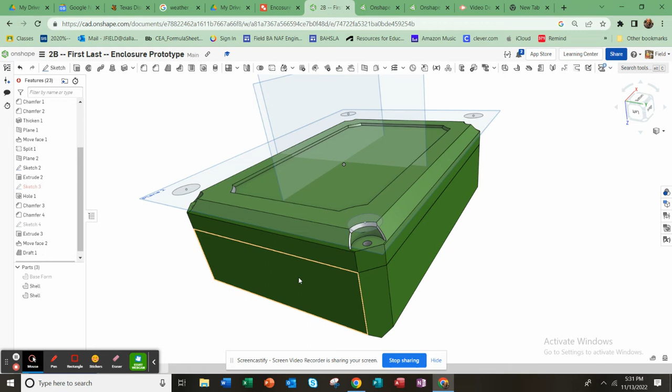Okay, once you've created your OnShape education account here and answered these questions, use your personal email so you can verify your account. There's two pages, then you verify your account and it brings you here. I'm going to show you how to progress in this EDD project.

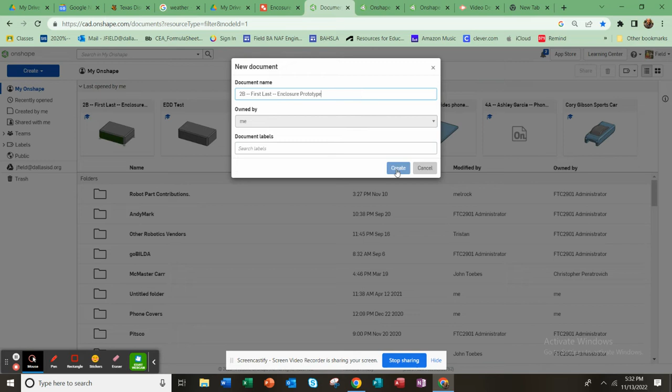You guys need to create these virtual products, and OnShape's a great tool for that. When you first log in, it brings you to this menu. I'm going to have you create a document, it works just like Google Drive. I'm going to name it: your period, your first last name, then enclosure prototype, space, dash dash, space, enclosure prototype, just like that shown. And then you hit create.

Since I like to grade these, for this assignment this week, hit share and then type in my email address, which is jfield, J-F-I-E-L-D, at DallasISD.org. You'll see my face come up there, select on it, and hit share. That's how I grade them.

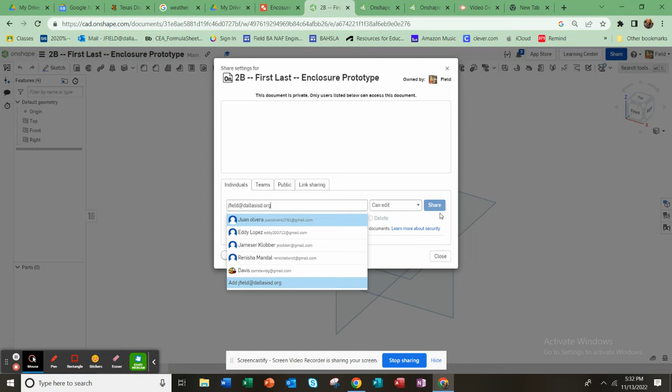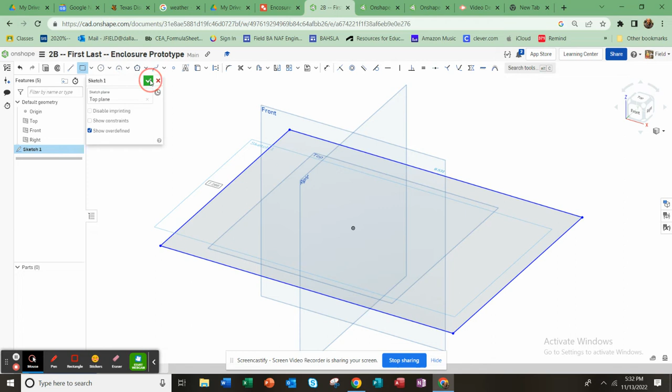Okay, so to make this enclosure prototype, we're going to start by selecting on the top plane over here. You can select over here on the left, and you've got a view cube on the right. In this case I want to sketch on it, so I make a 2-point rectangle by clicking the first point, dragging out, and selecting the second point. Then I hit the green check mark to end that sketch, and I can grab that closed profile I just made and drag it up, like that.

I'm going to move to viewing it with the perspective on, so that things get smaller as they get further away. I can see this a little better.

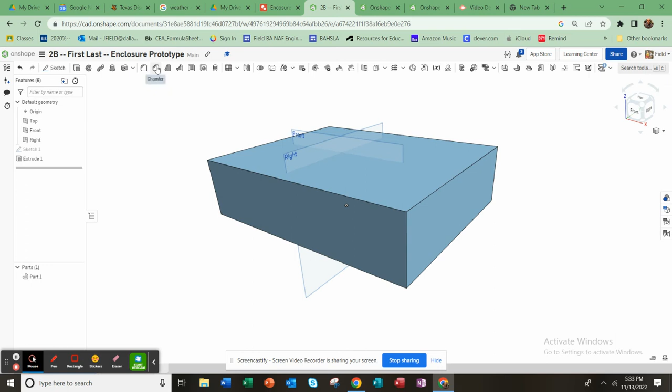Then I'm going to begin by chamfering the edge. You can chamfer just one edge of something, and you can type in the distance of the chamfer. Same with the fillets.

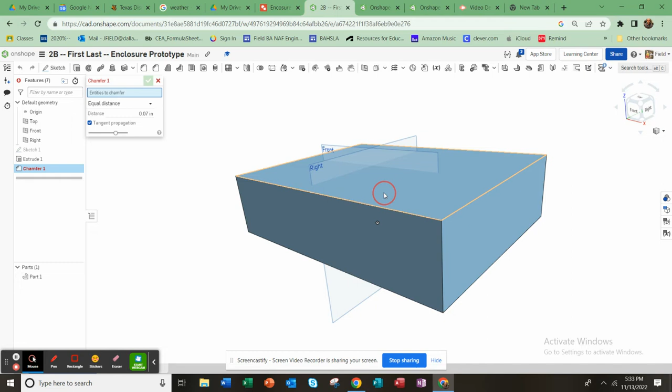You can also chamfer whole faces, like this face here, and we'll get the whole edge all the way around. I happen to know I want more like a 0.2 inch chamfer here, so I'll type that in. Yeah, that's better. Then I'll click on that face so it gets the top and bottom faces - those are the two things highlighted over here. You can click them off and repick them; in this case I wanted to pick that face like that.

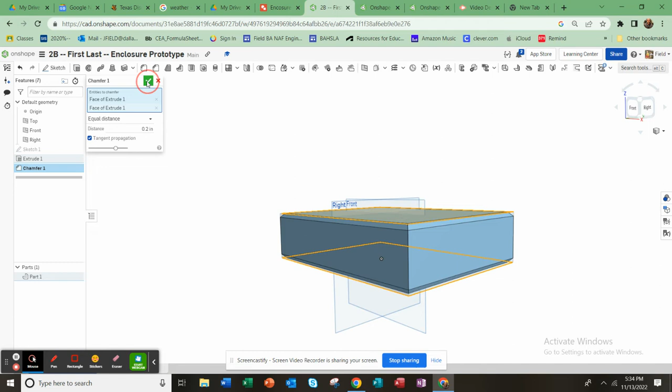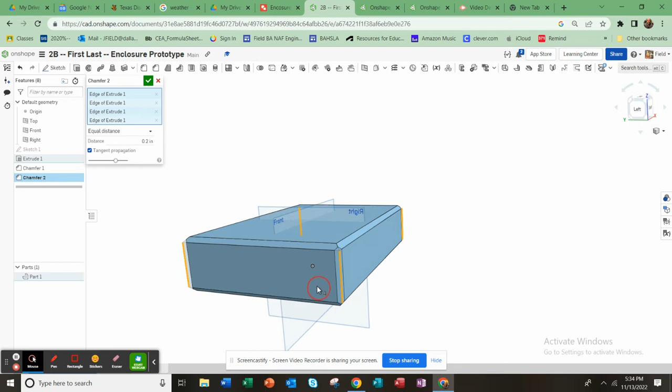I'm going to do the chamfer again here, just on these four corners. I'm spinning with the right mouse button. If you click on the lower right corner of your trackpad, it will also spin if you hold it down, so you can spin around if you don't have a mouse when you're doing this.

I want to make those a little bigger, so I'm going to make those 0.4. That's too big - 0.35 maybe. Still a little too big. Maybe 0.3, yeah, more of the look.

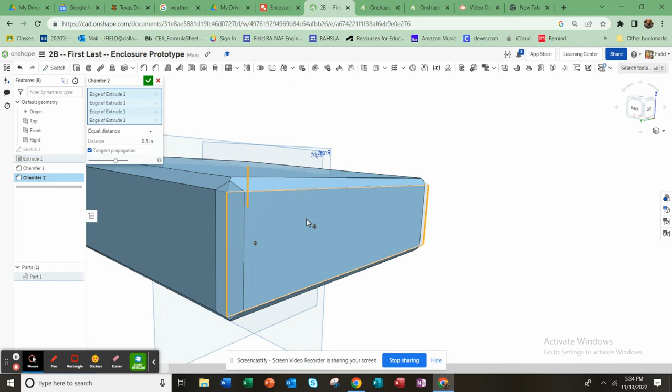You can see, just playing with simple shapes like this assignment - I'm basically calling it 'think outside the box,' or more practically, how do you actually make the box more interesting and compelling.

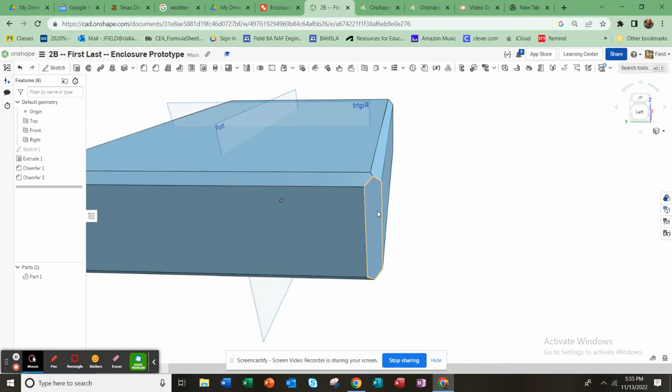So I'm going to go ahead and select that, and then move on to one of the next things I need to do, which is create a plane.

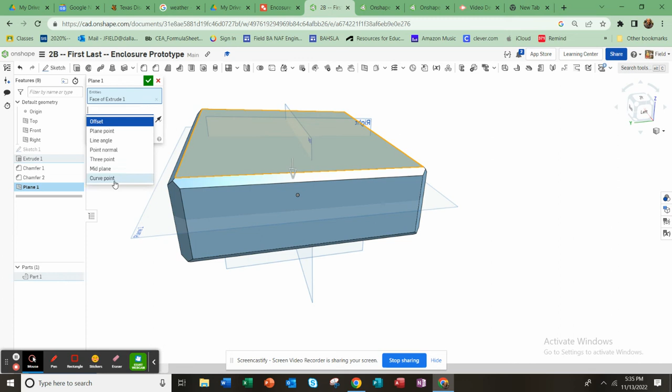I could do a plane offset - I select on that face and it creates a parallel offset plane at any distance I want to pick; in this case that'll be fine. I could also pick a mid plane - that's a great option when you're picking two faces. So I pick that face, click on entities over there, this top and this bottom, and it puts one right in the middle for me. That'll work for this exercise.

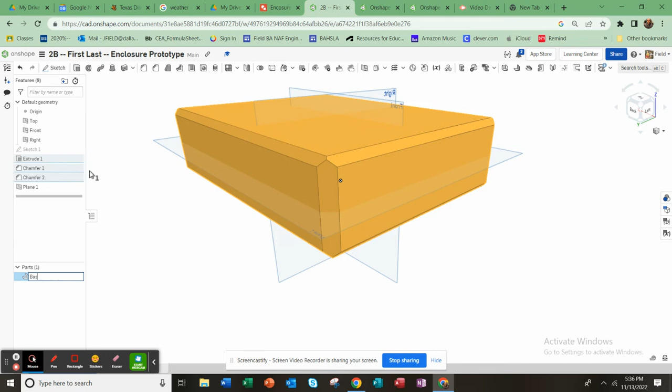Now what I want to point out is you have a solid cube with some chamfered edges. I'm going to rename that - right click on it, rename it base form. That's what I'm going to call that. Enter. Because right now I can pick that base form, and then actually I'm going to pick the thicken tool.

That didn't work like I wanted, so I'm going to drag out a box and see how it highlights all those faces at once. Now I'm going to thicken those - not 0.25 inches, but more like, how about 2 millimeters? You can see me type in the M.

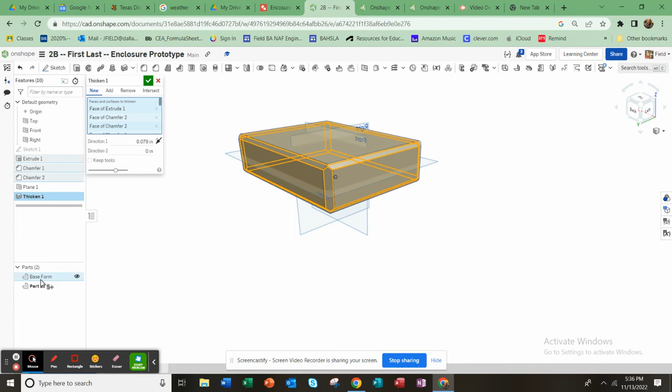Very importantly in Onshape, you have to make that a new part over here at the top, guys, new - so it makes it a separate part. You'll see it popped this new part in there. So now I have two different things: I have the base form and I have this new part.

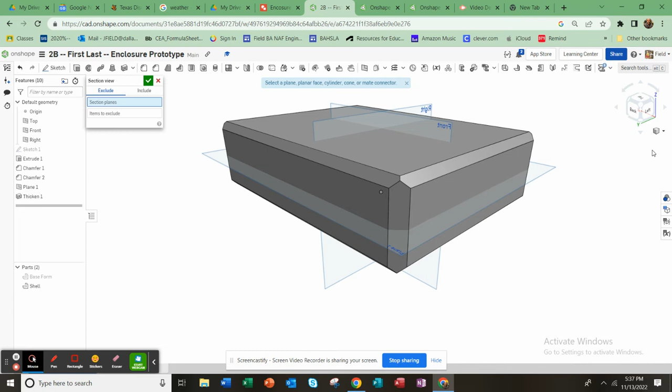I'm going to rename this the shell, and I'm going to no-show the base form. I'll show you that you could actually go down here to section view and select on that plane. I can move this and rotate it, and it will show me a section of this part. I know, that's pretty cool. Love that tool.

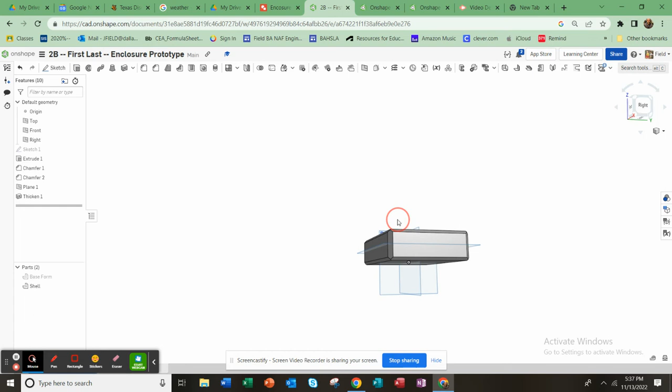Since I want to make this out of 2 parts, so we could 3D print this out of 2 parts, it's a removable box. What I'm going to do is split this now.

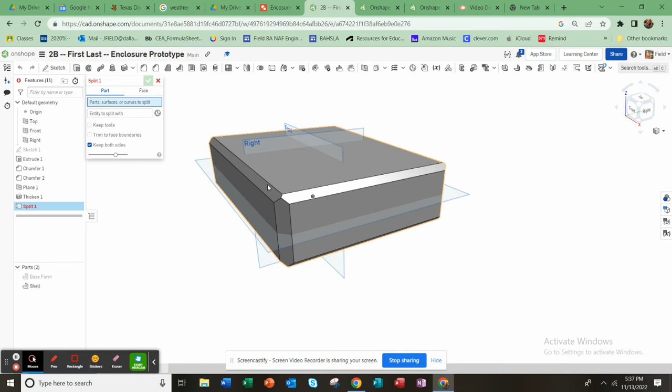So over here, there's that option, this icon here, split. And what do I want to split? I want to split the shell, and entity to split with. So I click on that red box, plane 1, and bam, it split that into 2 shells. And I can show the one, see it that way.

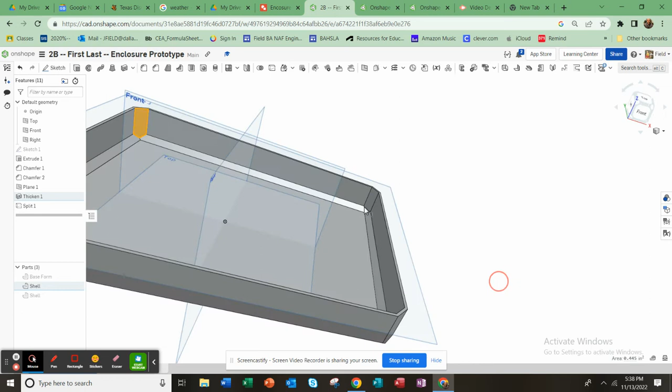That's a good spot for me to do one more little trick. I'm going to make more thickness here in the corners, so I have a place to have a boss for, in a way, a thickness part, so I can have a hole, attachment hole corner location. And I'm just realizing now I really should have done that before I did the split.

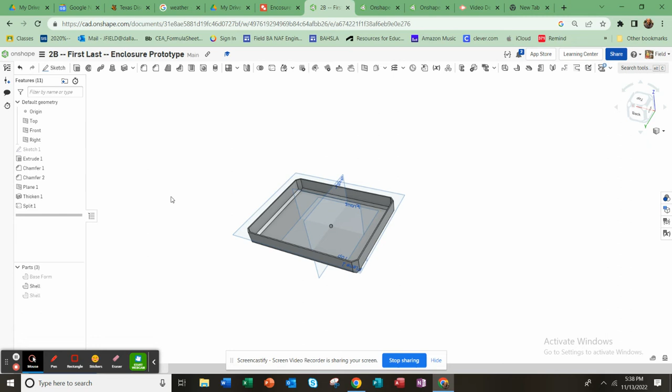And that's okay, so let me do this. I'm going to click on split and delete it, go back to when I had just all as one shell here.

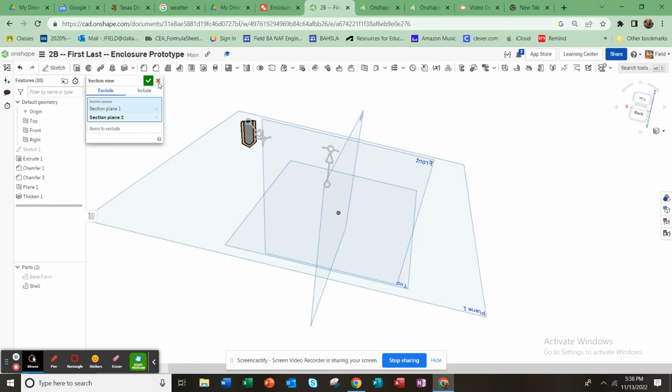I'll show you what I was doing by going back to the section view and clicking on my plane again. Watch, I need to do it here, which is pick on this face. Do this again, section view. Accept it, there we go.

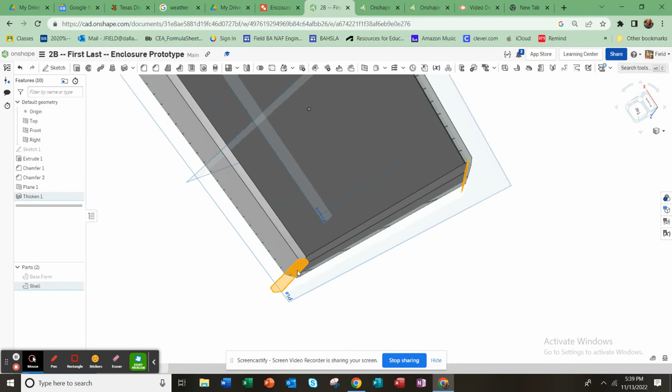Now I can pick on this corner, this corner, this corner, this corner, and do something else, which is pull a face or move a face. You see it adds some thickness to these corners, and I like it. 0.25, I think I can work with that.

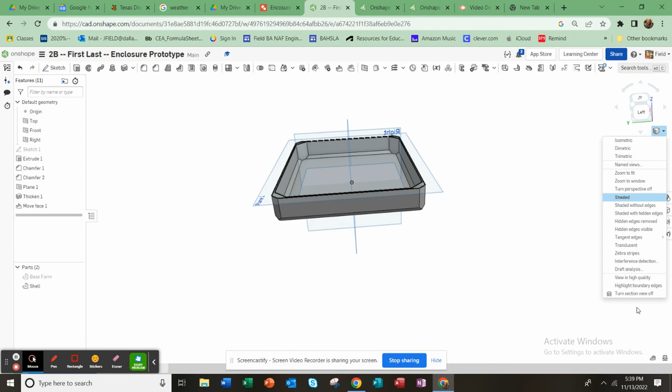And now I'm pretty much happy with that, so I'm going to go ahead and over here turn that perspective off again, and split this thing again. So I split it now, split the shell with the plane. There we go. I'm going to work on finishing this top piece.

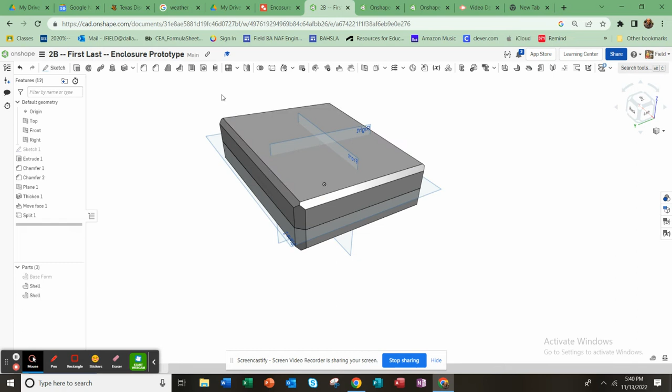A couple things I want to do with this top piece. One of the things is I'm going to put holes in the corners for attachment, and then also I'm going to design some more backfill in here at the top. So watch me, let me do that first. I can select on it, sketch on that top, and then I can do the offset tool here.

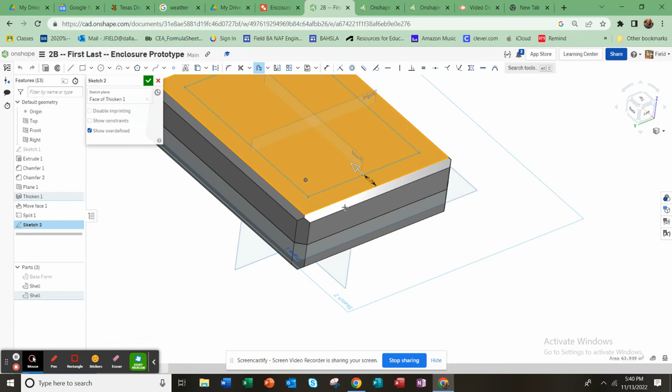And it will give me an offset of that, and I want to come into the back like that. Before I finish that, I'm going to actually round these corners at the edge.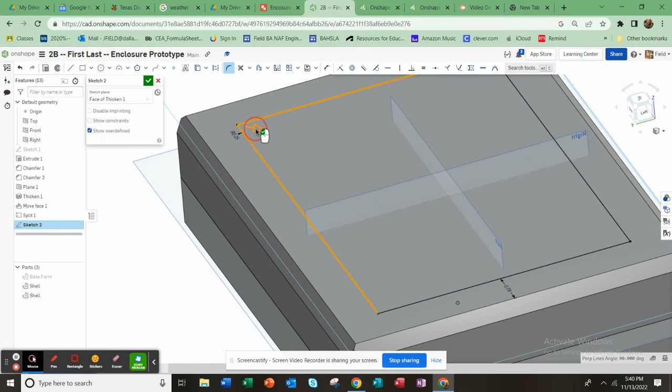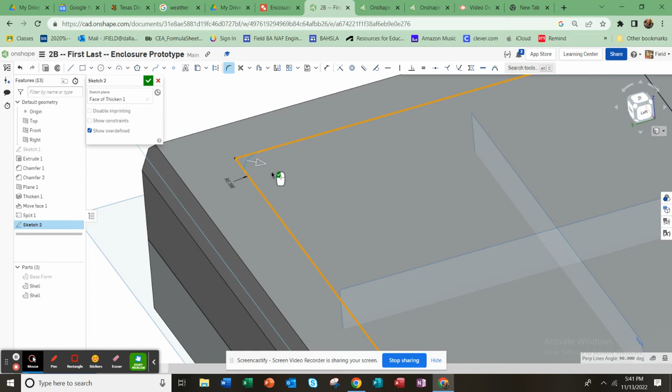So I'll pick those two, and it will put a rounded edge on it like that, and then I'm going to accept that, so left click. Oops, did it not do that? Try that again, round that edge, there. It says to left click, there, finally accepted it. Try that again, left click. Oh yeah? That's exciting.

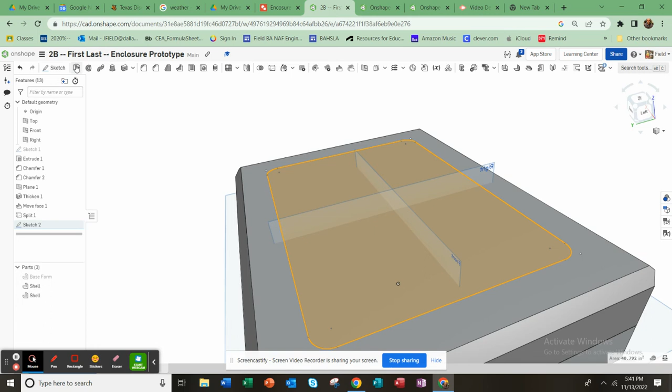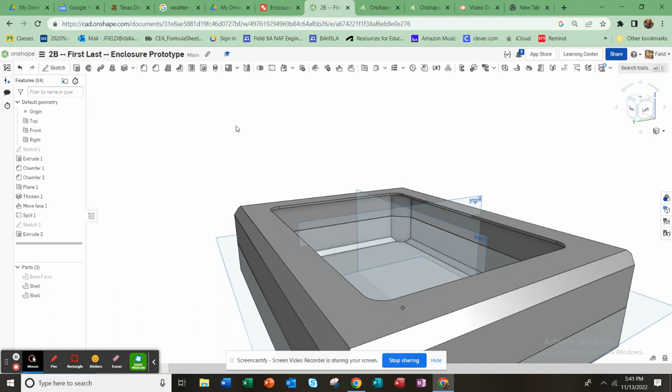Now instead, I'm going to remove in this case, okay, and so it's like a back drafted there. And I'm just realizing that's doing it into the shell of the thing, so it just kind of removed that. So I'm going to just make that a little bigger there.

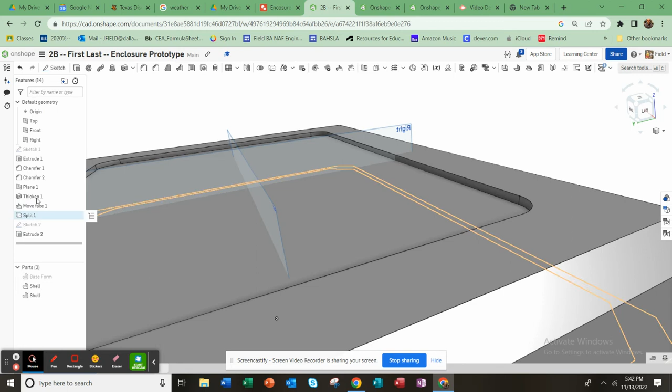And the other thing you can do is when you extrude remove, you can draft it. In this case, I think this looks better when we draft it with some more an angle, and so you'll see it kind of drafts that angle out a little bit more. That's a nicer look.

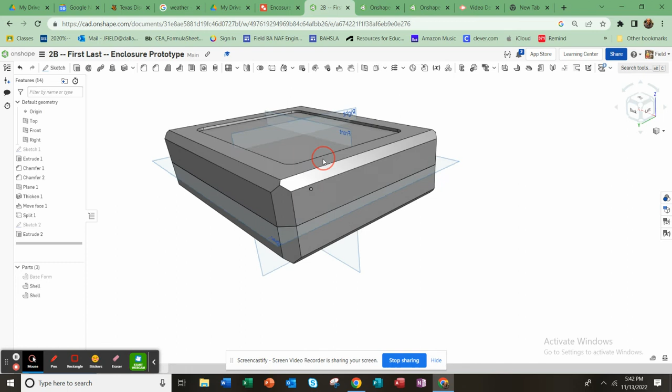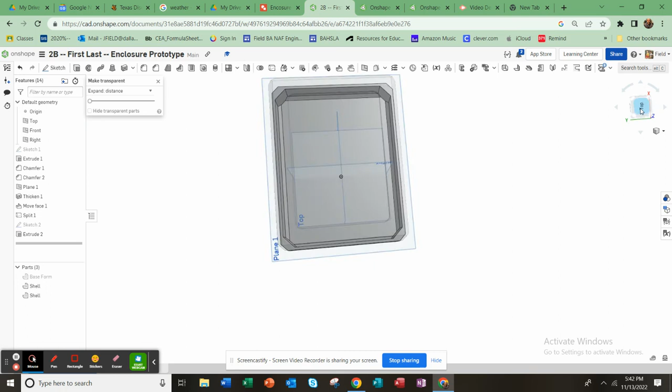And let me put these hole locations in for the boss. I'm going to do something where I can take this top shell, right click on it, and make it transparent, do this thing from the top. Go ahead and take the perspective off. Here it is. So I want these hole locations right over here.

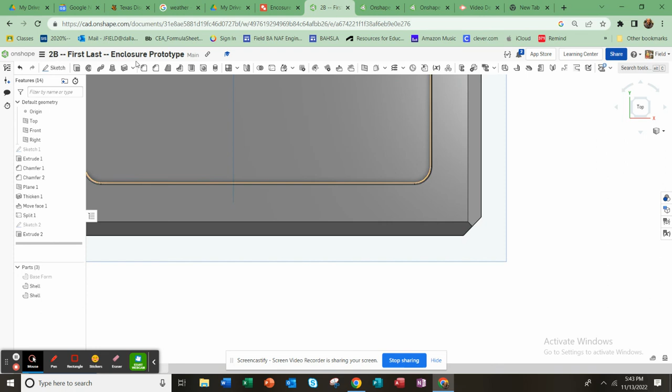I'm going to take that off for a second. There it is. And then go ahead and sketch on this plane, and then I'm going to put in points. I'm going to have to construct a line here probably first.

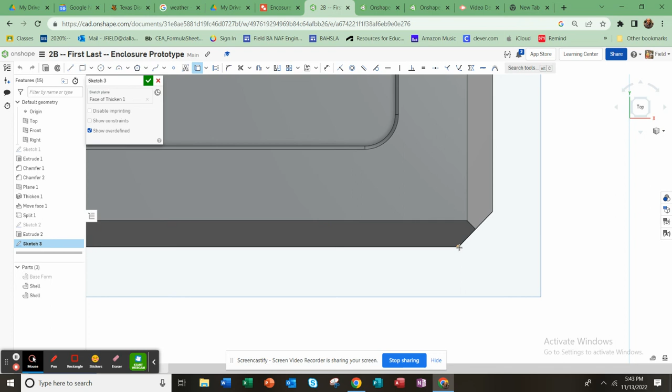And so I'm going to hit this use tool and use that point and that point. And we use more. We use tool uses different things in the background on your existing sketch plane. That's what that does.

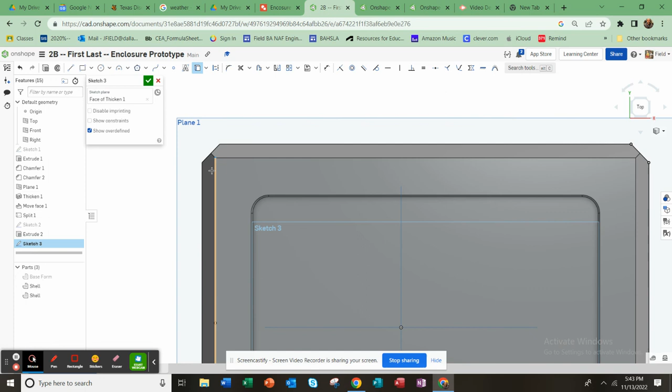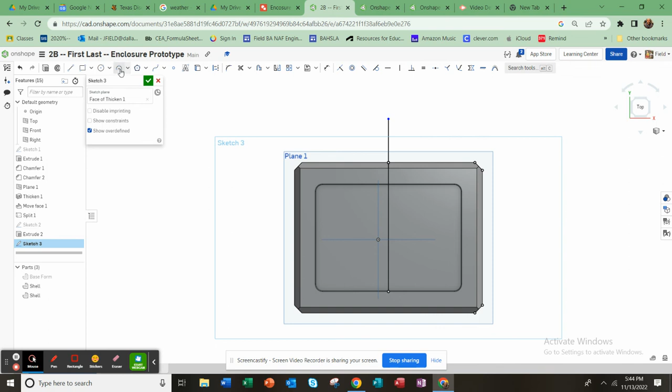And I'm going to use the midpoint here and here for a very specific reason, which is creating a line like this. That's going to be a mirror line. So now I can create a line, and then I drag over there. You'll see it knows that I want a line right there.

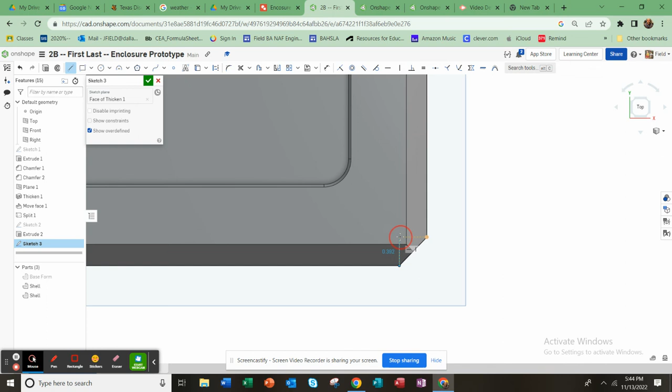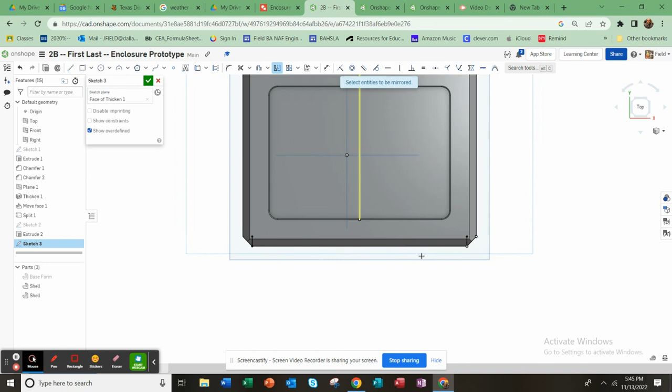And then the line tool again, another one right there, there it is. And then I'm going to mirror that over. Select the mirror line, it's like that. That point there, mirror, that point there. I guess I have to make the whole line mirrored over. That's fine, just like that point. There it is.

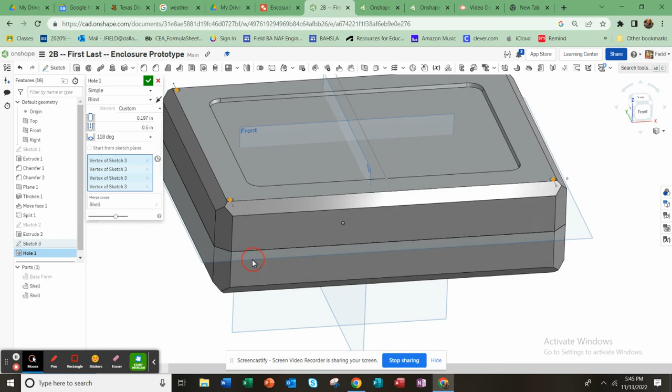All of that just so I can come here and do the hole tool to create these holes. And I can select that point, that point, that point, that point. And then I can do a counter bore or countersink. In this case, I'm going to do the countersink.

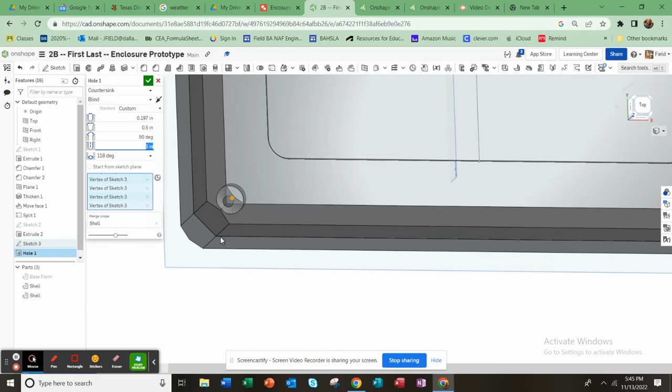And I can determine how far down, and I want to go about an inch there. And I can even thread that and 3D print it that way so a screw could go right in. 6 millimeters diameter instead of countersink, counter bore.

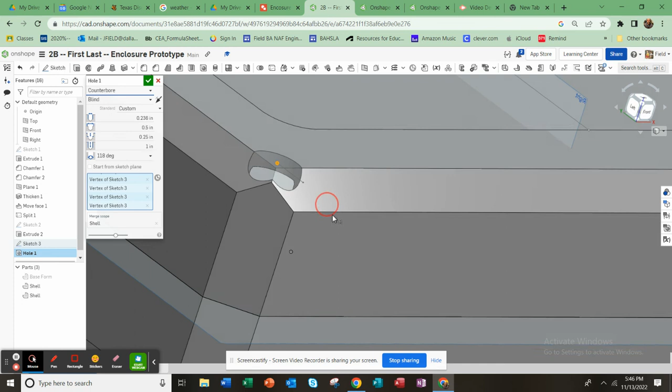And 0.7. There we go. Much better.

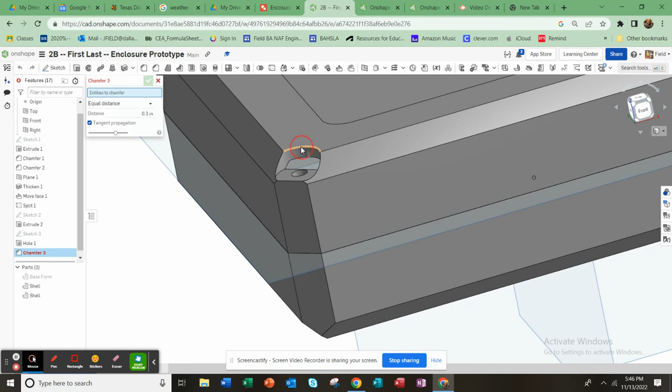And a couple more finishing touches. I'll do a little bit of a... And lastly, before I take my image, I'm going to see if I can color this.

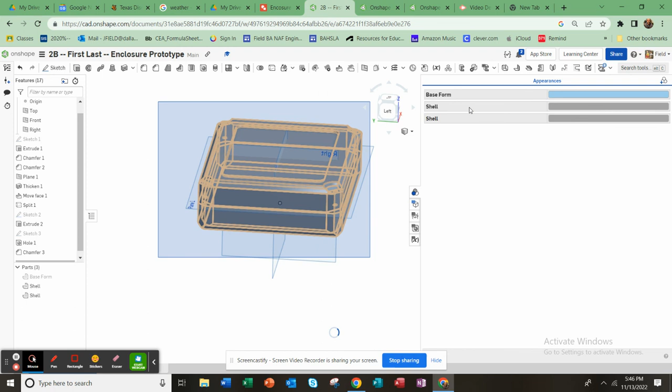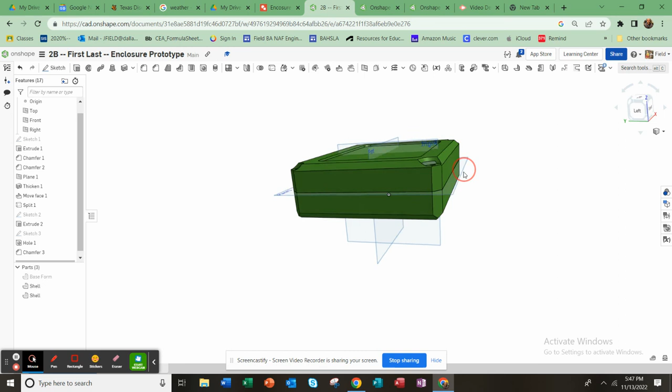Take all these faces. There we go. And view it with perspective on. It's kind of cool. It's already shared with me. All set.